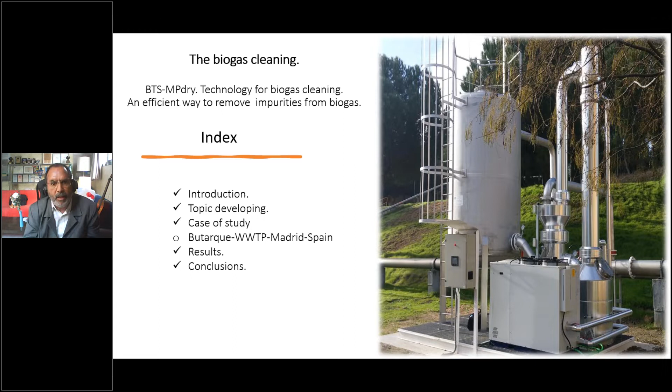This is the index that I want to present to all of you: introduction, topic development, and with all this knowledge, the case study. In this case, the Butarque wastewater treatment plant here in Madrid, one of the successful projects of our company. The results of applying this technology in this facility, and at the end, the conclusion of the project.

What can I say to introduce this topic? Biogas production, or a biogas plant or facility, has three main parts: biogas production, digestate treatment, and biogas purification. Why biogas purification? Because the biogas coming from the digester is a dirty gas, since it has many impurities. And if you want to use this biogas for energy production or for another product, you need to purify this biogas and remove all the impurities.

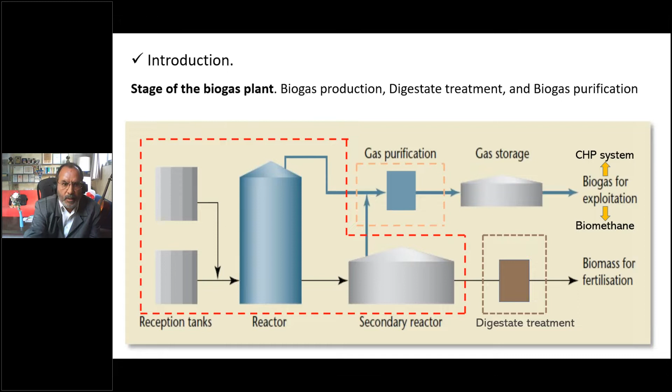So what is biogas? There are many definitions, but for the people, staff, or engineering group working on application or use of biogas, biogas is a gas mixture that has two main parts. One part is the major components: methane, CO2, nitrogen, oxygen, and so on. The other part is the impurities, the dangerous or pollutant components for use, such as hydrogen sulfide, siloxane, water vapor, hydrocarbons, and all these traces are dangerous for biogas application in any field. Therefore, biogas is always considered a dirty gas that requires prior cleaning for use as raw material for energy production or for other product production.

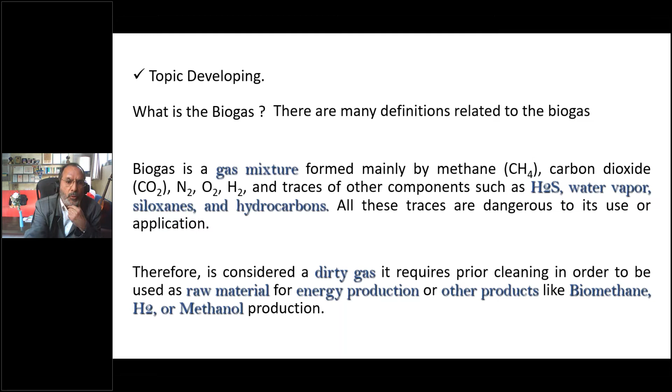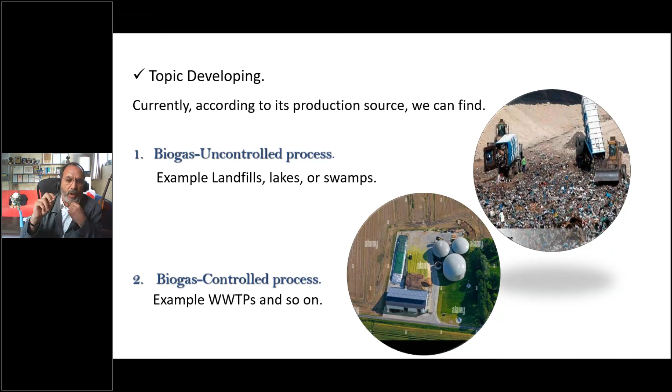Currently, we can talk about two kinds of biogas: biogas coming from an uncontrolled process, for example landfill, lake, or swamp, and biogas coming from a controlled process such as wastewater treatment plant, agricultural waste, industrial waste, and so on. In this table, you can see the difference between their composition depending on the origin or source of production.

The biogas coming from the controlled process has a high level of methane, low CO2, high level of hydrogen sulfide, and in some cases siloxane. However, biogas coming from landfill, for example, has a low level of methane, high level of CO2, high level of nitrogen, high level of oxygen. In some cases hydrogen sulfide appears, along with a high level of hydrocarbons of both types: heavy hydrocarbon and light hydrocarbon.

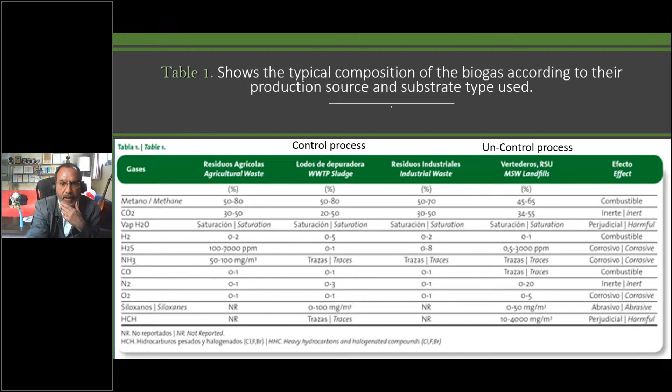What kind of impurity can we find in the biogas stream? Generally there are two types: external impurity and internal impurity. External impurity does not belong to the biogas loop, so it is not part of it. This must be removed by mechanical operation, like filtration or change in fluid direction or dimension. In this category we find sediment, foam, particle, condensate, and so on.

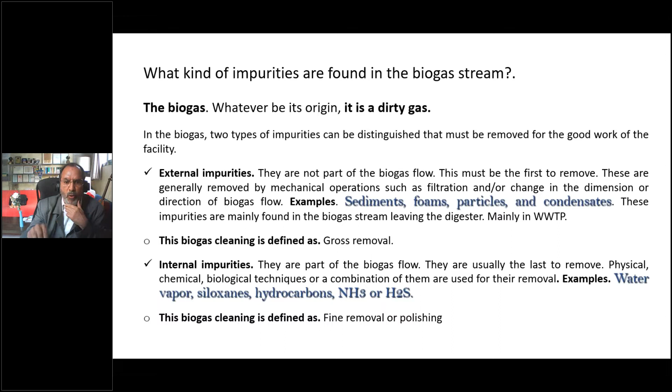Water vapor reduces or decreases the low heat value of the biogas, allows accumulation that causes blockage, and in some cases ice formation, mainly in the winter season. Hydrocarbon halogenates, mainly those containing chlorine and fluorine, provoke corrosion in different parts of the machine. Heavy hydrocarbons provoke the presence of aldehyde in the fuel gas and cause bad working of the machine.

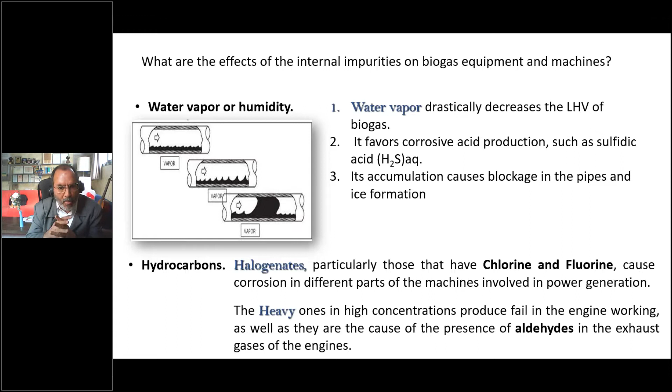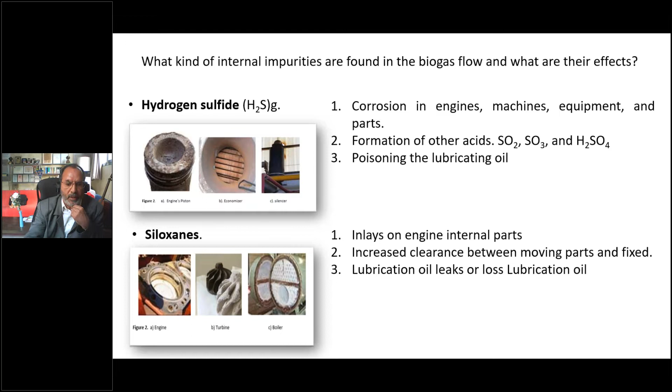What are the current techniques appearing in the market for biogas cleaning? A specific technique, a general technique, or a combined technique. A specific technique removes only one component, for example for hydrogen sulfide removal, water vapor removal, or siloxane removal.

For hydrogen sulfide removal, there are many techniques: biological, chemical, and physical. For example, biofilter, iron filter, chemical scrubber, biochemical scrubber. For water vapor, for example, dryer, condenser, condensate pot, adsorption on silica gel. For siloxanes, there are mainly two types of equipment in the market: membrane systems and silica gel adsorption. In the general technique, for example, we can find adsorption on active carbon, because carbon has the possibility to capture different components.

For example, at the same time siloxane, halogenated hydrocarbon, hydrogen sulfide, humidity, and so on. And combined technique working simultaneously or by stage, for example drying and active carbon, like our technology BTS-MP dry, and desulfuration plus drying, and so on.

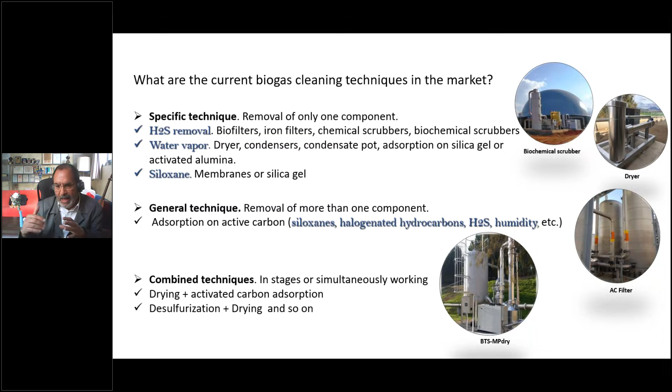What must be part of the biogas cleaning facility? From our point of view, there are three main parts of biogas cleaning technology: biogas desulfuration, biogas drying, and biogas polishing. Biogas desulfuration depends on the biogas type, or the origin of the biogas.

It could be done at the source, or at origin, in the digester, or over the material to be treated, for example in a wastewater treatment plant, by chemical dosing, oxygen or air injection, thermal or biological hydrolysis.

In the case that the desulfuration will be in the biogas line, for example like in a wastewater treatment plant, landfill, and so on facility, you can do this removal by physical, chemical, biochemical, or biological technique.

Biogas drying aims to remove water vapor, but in this case, if you work at low temperature, for example below 4 Celsius degrees, you can remove at the same time volatile organic compounds, hydrocarbon, and siloxane. In this case, you can combine condensation and drying technique.

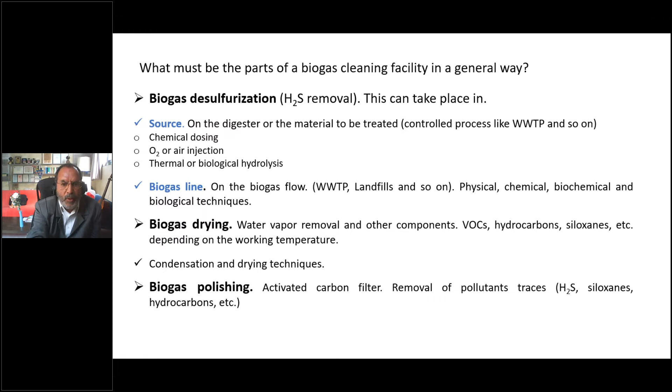I want to show this case study briefly, the case of the wastewater treatment plant Butarque in Madrid, Spain, with our technology BTS-MP dry. Here is the wastewater treatment plant Butarque, digester, gas holder, and down below you can find our technology.

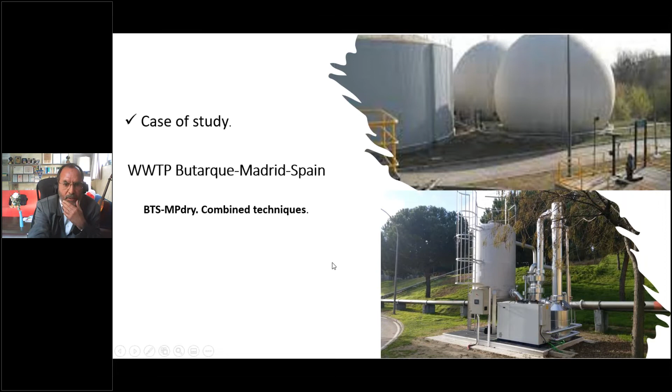Let me explain more or less how this technology works. This technology has two parts: one is the cooling system, and the other is the polishing system by active carbon. In this case, in the cooling system, two ways of cooling appear at the same time. We use and recommend using the heat recovery. And the other part is the cooling system.

In this case, it's the cooling biogas exchanging heat with the hot gas. With this system, we reduce the power or energy consumption of the chiller, and at the same time reduce the relative humidity of the biogas. For that reason, the biogas gets into the filter in good condition to undergo the adsorption process.

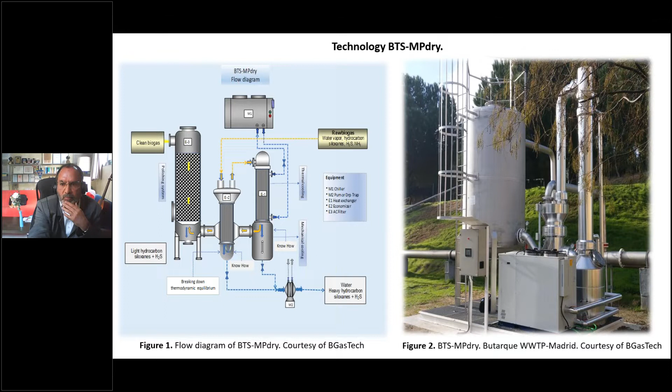Here appears our technology. Here, screen, control screen, filter, cooling system, and chiller.

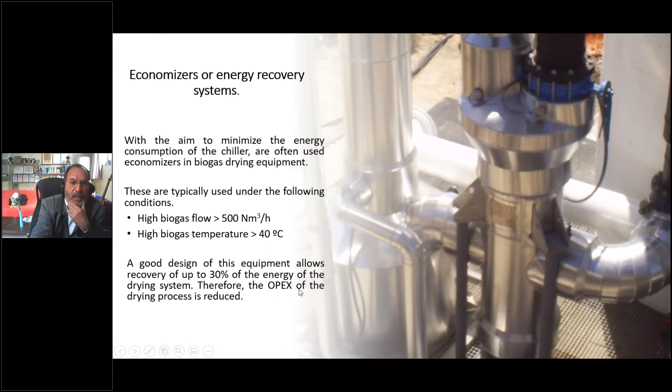Economizer. Let me explain a little about the economizer. From our point of view, we recommend using energy recovery for biogas flow higher than 500 normal cubic meters per hour, and for temperature higher than 40 Celsius degrees. At least in our experience, with a good design of this equipment, we allow recovery of up to 30% of the energy of the drying system. Therefore, the OPEX of the drying process is reduced.

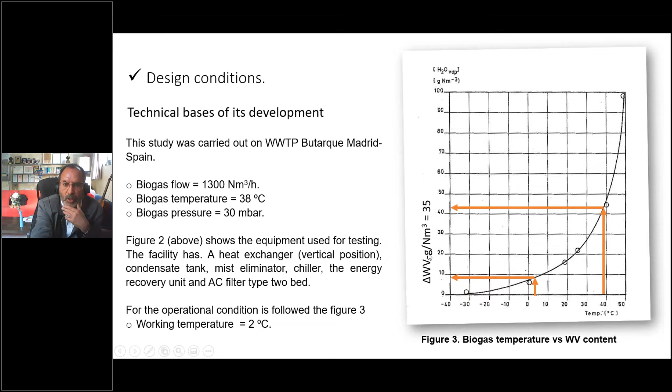What are the conditions I use for operation of this technology? In this case, this chart appears, showing the temperature here and the water vapor content by normal cubic meter. We go from 38 Celsius degrees to 2 Celsius degrees working temperature. In this case, we remove 35 grams of water vapor per normal cubic meter. But at the same time, relating with this kind of chart too, we can remove up to 40% of siloxane.

That's it, when we work at this temperature. At the same time, we remove water and we remove one of the main pollutants found in both landfill gas and in the wastewater treatment plant.

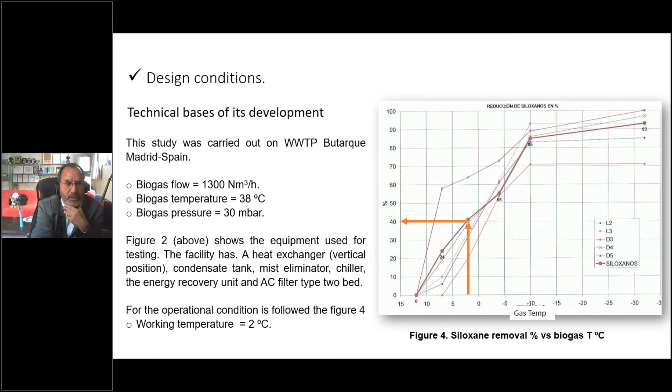What is the result of this? The first result is reducing the siloxane in the biogas in all cases, and at the same time reducing the silicon in this type. This is the result before BTS and after BTS application.

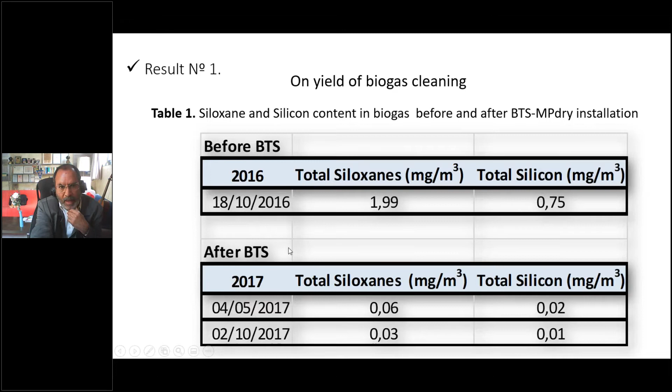And what does this provoke? This provokes that the concentration of silicon, mainly in the oil, in the lubricant oil in the engine, is reduced to lower than 10 ppm. For that reason, the maintenance cost is reduced at the same time.

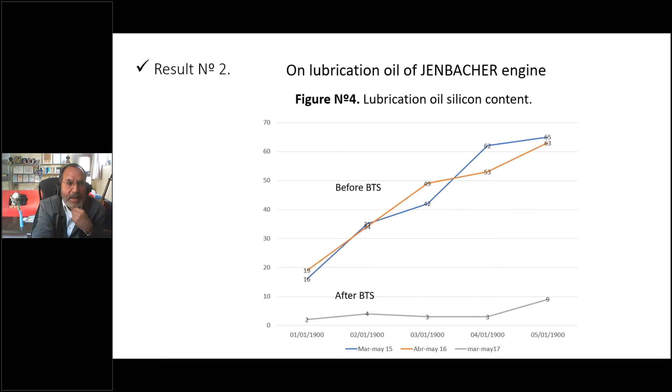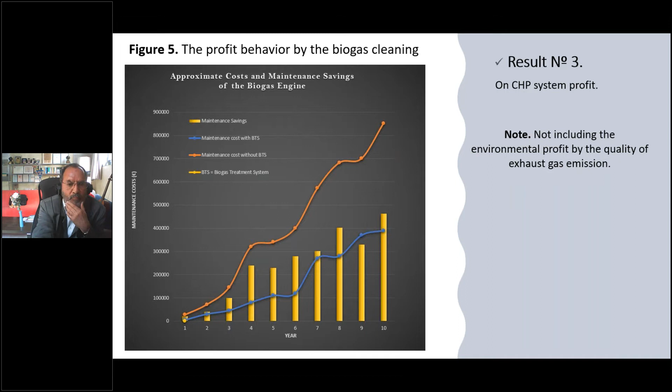For that reason, the conclusion of this case study presentation is: optimal machine working for engine, turbine, boiler, vehicle reduces the maintenance cost; longer useful life of the machine and equipment used for pumping, compression, blower and compressor, in this case using biogas transport; and improvement in the exhaust gas emission of engine, turbine, and steam boiler, and safer staff work due to avoided toxic concentration exposure to humans.

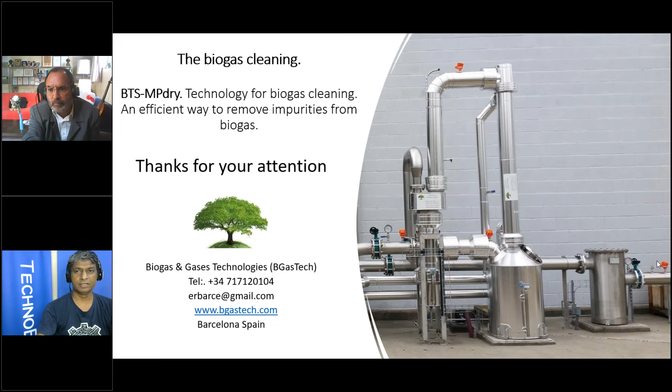I'd like to ask you a couple of points for you to explain more. In your system, the first section is removing the vapor, is that right? Water vapor is the first thing to remove? Yes. And after that, is it any dirt or solid particles that go next, by changing the flow? Is that correct?

Okay, and after that you go on to cleaning in terms of hydrogen sulfide or hydrocarbons and things like that? Yes, right.

We recommend, due to the impurities that appear in the biogas flow or in the production of biogas in any facility, first removing the external impurities like sediment, foam, particles, and condensate that form part of the biogas stream but not the biogas flow itself. This is external removal, gross removal, to remove external impurity and define the biogas flow. After that we do fine cleaning to remove internal impurities like water vapor, siloxane, hydrogen sulfide, okay.